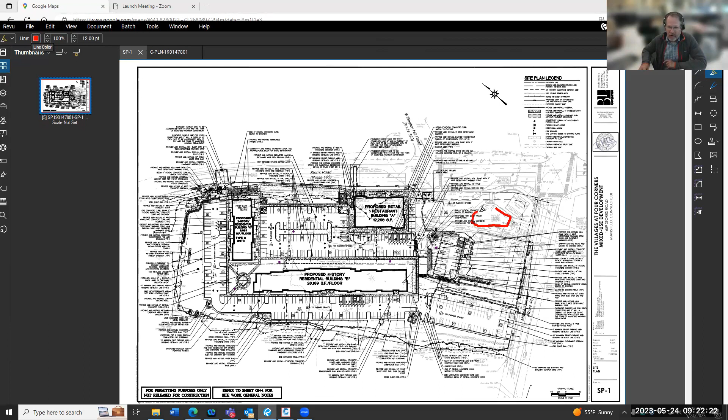Middle Turnpike is along the right-hand side of the sheet here. I'll just leave some marks. The existing gas station building is at this location in the corner. Hops Company, Toast 44 is at this location, also with access from 44.

What we propose to do is create 3 new buildings out here. One would be a commercial building at this location, approximately 12,200 square feet of new commercial space. Then 2 new residential buildings — one residential building at the far north side of the site, a townhouse building containing 14 units, and another multi-story apartment building located in a north-south orientation at this location of the site.

As far as access goes, today there's existing signalized access from 195, also at the intersection of Route 320, at this location here. There's also access to Middle Turnpike from the gas station at this location, and a little further to the west there's another driveway for access to the Hops Company Toast right here. We'll be proposing a new right-in, right-out driveway at the far northerly end of our site to 195.

With regards to pedestrian access, we're extending the existing sidewalk from the existing signalized drive to the north along 195. We will be providing a new sidewalk connection to the standard shown at this location to the north — they'll be extending a sidewalk connection to their property where we will meet that location. We'll provide sidewalks throughout our development to connect all the buildings as well as the commercial space, with various crosswalks to provide access back and forth. We'll also be extending sidewalks to the west on Route 44 down to the Hops Company.

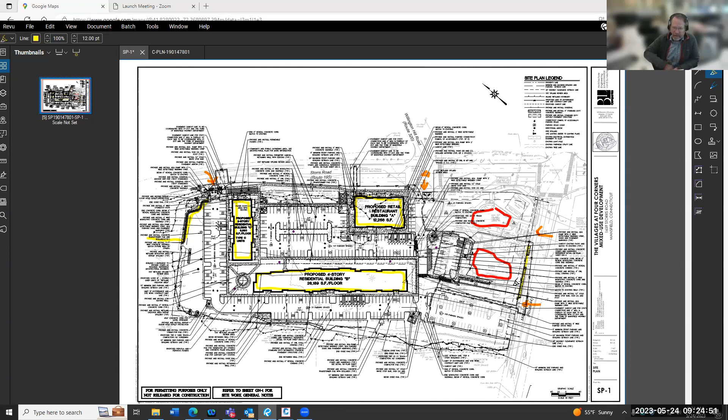There were some comments that we're looking at addressing, to provide additional sidewalks and crosswalk signage in various areas throughout the site and along the roadways. With that, I'm going to turn things over to Mike Shepley and Mike Dion, and I'd be happy to leave this up and zoom into any of the areas you want, unless you guys want to share any of the exhibits in your report. Thanks.

Sure, I guess what I'll say is based on our report, we have minimum impact to the surrounding traffic network. We looked at and analyzed both the AM and PM peak hours under this site plan.

I guess, do we want to go through the comments with Weston and Sampson, or do you want me to just give a rundown of the general traffic items for the report? Jen, it's whatever you guys would prefer. I think at a high level — it's up to the other folks on the committee, but I think keep it high level, unless folks would like more. The outcome is for you to make comments, to provide guidance, to look at your charge and see if their plan is acceptable. So high level is good with me. Yeah, I had considered — I heard a presentation eerily similar to this last week at the Economic Development Commission meeting on the project, so it's good to hear it twice, more sinks in.

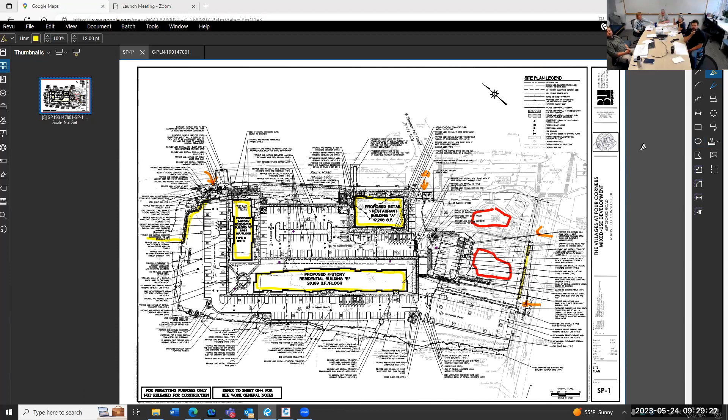Isn't there a loading zone associated with the Hops 44? And how is loading going to be addressed at the proposed retail and restaurant building? John, can you answer that?

Yeah, I can address that. So there is, I see another curb cut - yeah, so there's an existing curb cut for Toast Hops Company. I'll just pull up Google Earth here. You can see how they're doing some of their loading today in this area.

I think they've got some refuse collection here where some of their loading's happening. This area we're not touching, it'll remain unchanged. And obviously you can see the end of the sidewalk here on the right - we'll be extending sidewalks along the front, so there'll be a new apron in here. But as far as maneuverability, this area will remain unchanged.

Jumping back to the site plan, we do propose a new loading zone at this location, which is going to be used for the new commercial building at this location. We do have dumpsters throughout the site as well.

One of the comments from Weston Sampson was asking us for turning movements. So we've prepared documents showing maneuverability, truck access for not only our loading dock, but also for the proposed dumpster locations throughout the site. This location on the side is where the current loading is for Hops today, and that will remain unchanged.

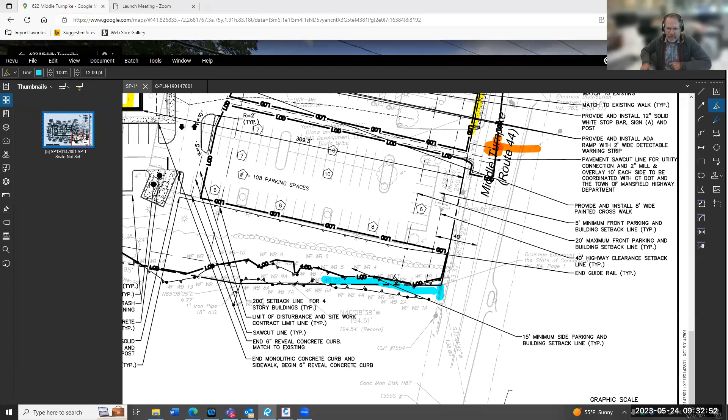If I jump back to the plan, you can see here where we've got a wetland area, a stream in this area, which is where the head wall is. There's not available right-of-way to install a sidewalk in this area, which is why we chose to end it at the proposed driveway, or the existing driveway rather.

But it seems like then you're just leaving somebody in limbo if they were vision impaired. At least they'd have a crossing on the other side in a refuge versus just leaving them in the middle of an intersection or a driveway.

Well, I'm not opposed to, if you're asking, can we create a crosswalk here with a dead end sidewalk, that's fine, we can certainly do that. I'm just saying I can't extend the sidewalk to the limits of our property because of the guide rail. We can certainly bring the sidewalk up and stop it at the guide rail. That's not an issue, if that's something that's amenable.

I think the Planning and Zoning Commission is going to want us to see a sidewalk along the full frontage. That's how they've interpreted this, for example, for the standard, then they let DOT determine if that's going to be feasible. So I think anything you can do to promote pedestrian access along there, when you're presenting to planning and zoning, you're going to need to demonstrate that.

Okay, we can certainly review this and see if we can come up with another alternative. Again, the guide rail is there as a safety measure to protect the culvert, so the state's not going to allow me to move that. That pushes us to look for a solution where we can keep that in place, and basically the sidewalk would need to move onto private property and then dead end at the wetlands.

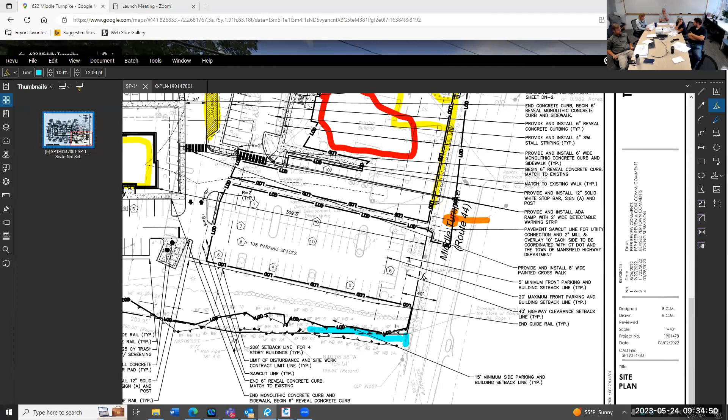And then to the north, it looks like that loading zone is only 36 feet long. I didn't have a dimension in length, but it doesn't appear that would—this is the loading zone that's currently in yellow—yes, correct, 12-foot wide. It doesn't look like it could accommodate any of the typical delivery vehicles that would be expected.

Again, we're looking at that right now. I know we've prepared some plans to address the comments, and I don't off the top of my head recall what size vehicle. I know we're taking a look at, to your point, can a vehicle get in here in a single movement, and do we need to extend this area at all?

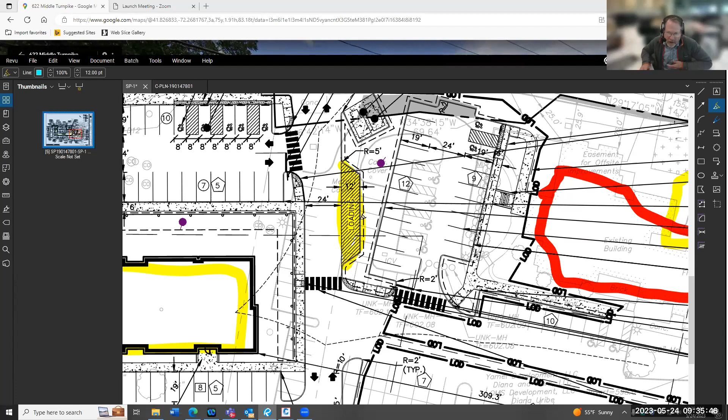We certainly have room, we can move, we could shift to the east and to the west if we need to lengthen that at all. But it's certainly something we're looking at now, to provide not only the radiuses to turn the vehicle in, but to provide space large enough for the largest vehicle. We are looking at that now.

And then the only other concern I had was the presence of those parking spots at the entrance of the intersection with 320. When you have a backing up movement, it looks like somebody would remain in Storrs Road, that bank of parking, these spaces.

Yes, again, something we're actually also looking at based on the comments. There are some parking requirements we're taking a look at, how we can meet those, where we're at currently to provide enough parking for the whole development. And we're seriously looking at eliminating some, if not all, of those spaces at this time.

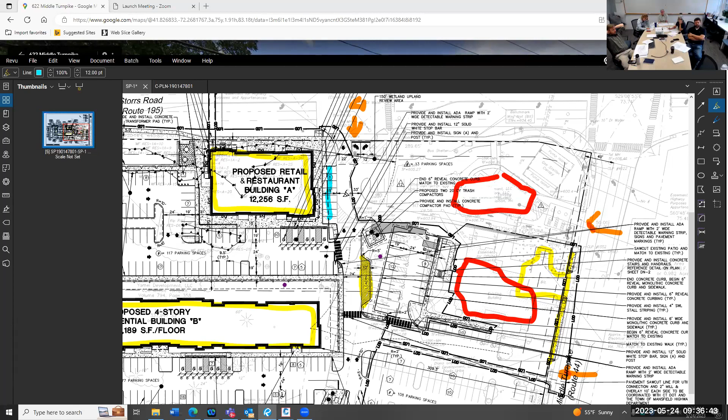One of the long-term thoughts or goal projects in this corridor is basically to incorporate roundabouts at the two intersections at 320 and 44. Could you maybe speak to what hindrances could exist there at this point? Because, from our conceptual review, there would be some concern that the roundabout wouldn't be able to fit in that intersection.

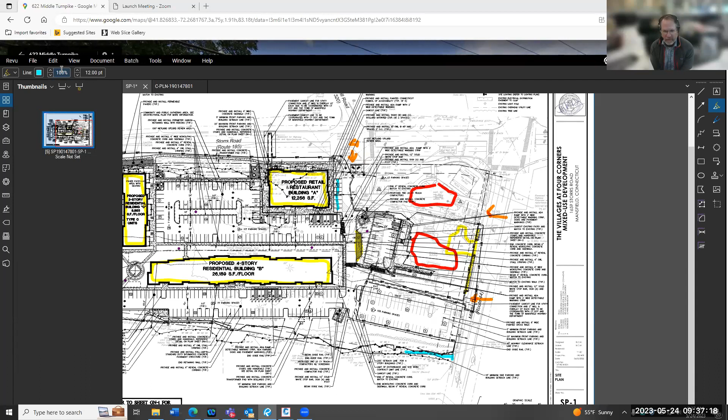Well, I was provided with a copy of the schematic roundabout plan. Attorney Smith had provided that to us a while back, so I'm aware of the concept. I don't think it's advanced beyond that, but there's the potential that the state would need to do takings of property in order to fit the roundabouts there, or they may choose to go with something smaller. As the design progressed, that would be something they'd have to look seriously about, how they'd get everything to fit. So when I look at the proposed retail restaurant space, there may be other considerations. I'm not an engineer certainly, but on this schematic, the upper right kind of corner of that space seems to be what could be bleeding into whatever the dimensions of the roundabout would need to be.

So do we know, or do you know at this point, whether or not, as shown here, there's overlap? And if there is, is there enough flexibility or adaptability within your site to, to use a layperson's term, shift the footprint of that building enough to accommodate your project needs, but preserve the future option of the roundabout, or better preserve that option?

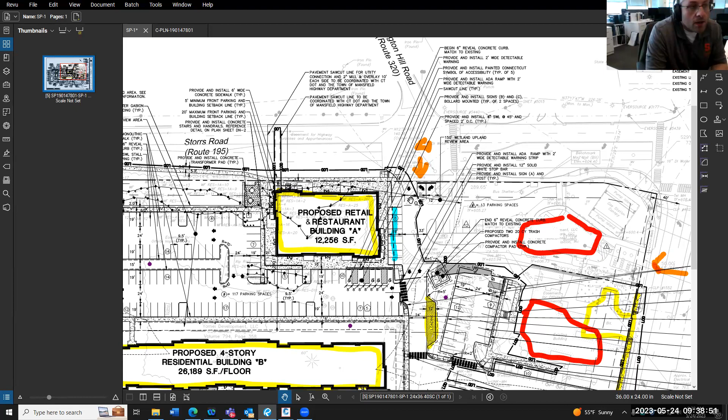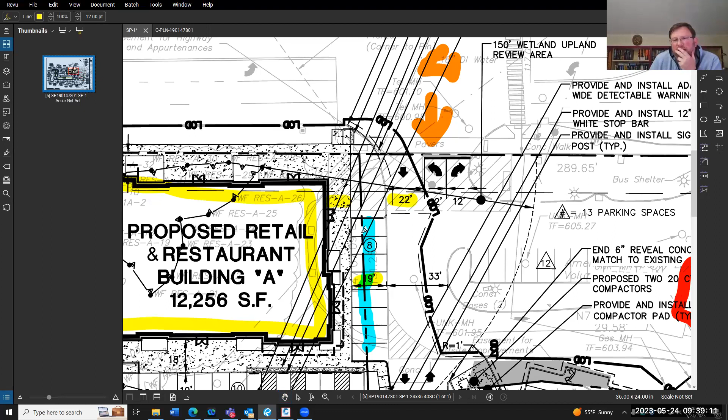John, could you just give a dimension from the center of the existing intersection to the corner of the building? I'm just curious how big of a diameter that would be. So you can see here, the dimension is 22 feet here. This is a 19-foot parking space, and roughly 10 feet of space, plus sidewalk from here. It's about 85 feet. Okay, yeah, it's gonna be tight to get the roundabout and fit that building.

Are they looking at a 2-lane roundabout? I haven't seen that concept. I apologize, this is Jeff Santa Cruz, Weston and Sampson. The state will only do single right now. Okay, yeah, that's typically what we've run into, is the state's very apprehensive about going with 2-lane roundabouts because motorists don't really know how to navigate them.

Do they do a traditional just straight single lane, or do they do like a hybrid where it has a left turn for major movements? Down in Salem, they have the hybrid left turn movement, was it on 82 and 85 down there? So they've done that in the past. It's just more of a traditional 2-lane roundabout there.

Okay, so it would be tight against you. You might be able to shift the round-- there's actually not a lot of deflection on that either. So it's very conceptual, and I don't know who developed this.

This was obviously provided to us. We had 3 days to get something together. It's not bad for 3 days. So what have you got looks there? Is that about a 120, 130 foot diameter roundabout?

Is that what that is, give or take? Approximately, to the outer dimension. Yeah, it's smaller. But all the approaches to these intersections is 1 lane in, 1 lane out. Right, so it doesn't make sense why you'd need a 2-lane roundabout when the approaches are single lane. Well, today the approaches are multi-lane, only because of the light on the main line, and then the side.

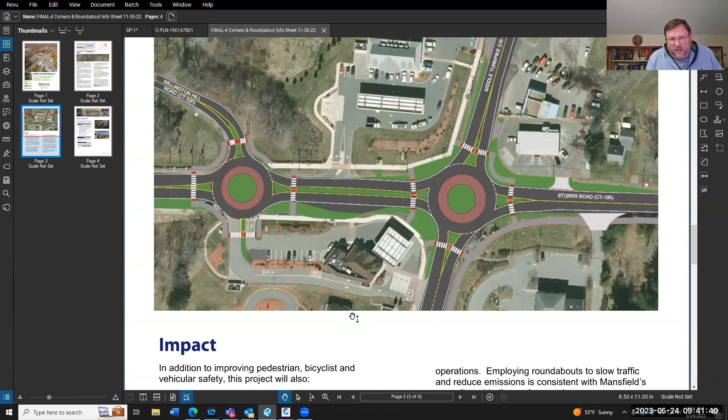If you figure 120 foot diameter, one thing you've got to consider is not only do you have the pavement of the 120 foot, but then you've got a grass strip from the roundabout to that shared use path, and then you've got the shared use path. So if you figure 120, say a 5 to 6 foot grass strip and another 8 to 10 foot bike path on either side, that starts to make that entire roundabout closer to 160 feet, which would put it, if it's centered on that intersection, pretty close to the corner of the building.

As drawn conceptually, without shifting it more onto 195 and 320, if you're centering it right on the middle, I think the hardest thing was making sure we got enough shift at that intersection with 320 if we shifted it to the upper portion of the site. But anything's possible with the deflector islands.

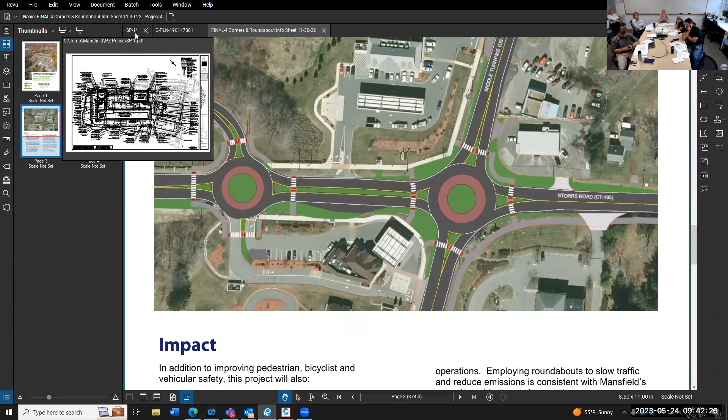I'm just trying to make sure people consider those outer pieces, the bike path and that grass strip. I think the biggest thing is making sure whatever's proposed is cognizant of that plan - that's really our only comment. It's a big project, a lot of reasons why it may not come to fruition, but I don't want this to be the reason why it doesn't.

We can certainly take a look at options and opportunities to adjust the location of that building. Because of the plan you've given us, we can schematically lay that in and see what the impact potentially could be, and we'll take a look at that. It's definitely the tighter side of the two rights of way, so there's some understanding of that. But thank you very much for the consideration.

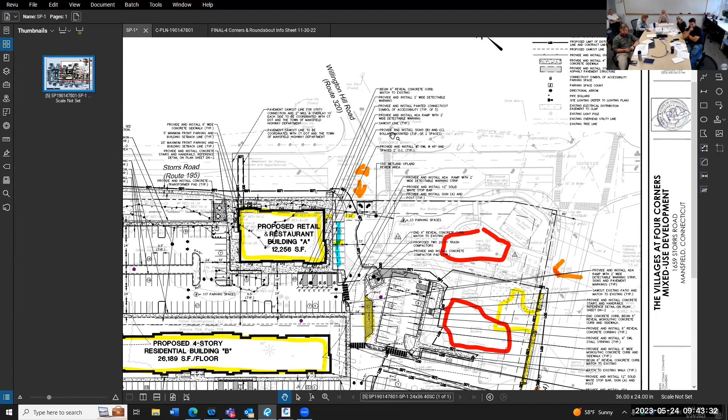All right, any other questions or anything else? Do you want to look at anything interior, any interior flow or safety? I think the comments definitely addressed quite a bit there. It's not really a town issue, but I would think that having direct or indirect access to the Hops Toast building off of 195, as opposed to having to go around since there's no existing connection between the gas station, is helpful for people and for the businesses.

Just to be able to navigate fire apparatus through there. And Paul and John, you've been in touch with - I know we had our overview meeting last week - but you've been in touch with Adam Libros and our fire marshal, just to make sure you've dotted all your i's and crossed all your t's before you have to make adjustments after the special permit is approved.

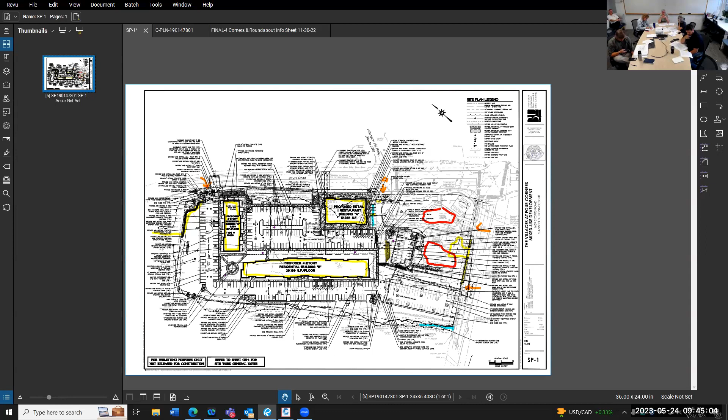Yes, we're reaching out to a number of folks in the town, including the fire marshal. I think from a traffic authority standpoint we're okay - we're just going to support the peer reviewers' comments at this point. Thank you. Thank you all very much.

Next on the agenda is 497 Middle Turnpike, 17 Cedar Swamp Road, and 3 parcels known as Cedar Swamp Road. We have Joe Williams, Chuck Lee, Tim O'Neill, and Maximo Polanco, who I've not met yet. If you all want to give a high-level overview similar to the previous applicant, and then talk about the traffic study - I know you just got the comments from Weston and Sampson yesterday, but hopefully you've had a chance to look at them - then Jeff can chime in as needed.

Sure, I'll start us off. Good morning, everyone. I'm Joe Williams, a land use attorney with Shipman and Goodwin in Hartford, and we're all glad to be here with you on behalf of your applicant, CMC Storrs SPV LLC. As Jennifer mentioned, my client Chuck Lee is here as well. I'll give a short introduction, then turn it to Tim O'Neill, our project engineer with Langan, to give you an overview of the project and the site plan. Then Tim will turn it to his colleagues to discuss our traffic study and the comments we received from Weston and Sampson.

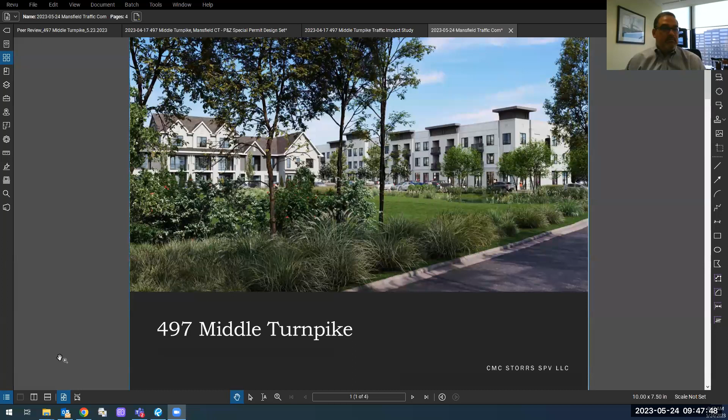So with that, I think I should stop there and turn it to Tim O'Neill. We have a special permit application pending before the Planning and Zoning Commission. We're glad to be here with you and look forward to hearing your comments. Take it away, Tim.

Thanks, Joe. Appreciate it. As Joe mentioned, the property is located at 497 Middle Turnpike. Here you can see the site highlighted in yellow with the property line. The total acreage on the parcel is just over 63 acres. Our development will be located in the southeastern 15 acres where the previous 9-hole golf course is located. I'll show you that region in just a second.

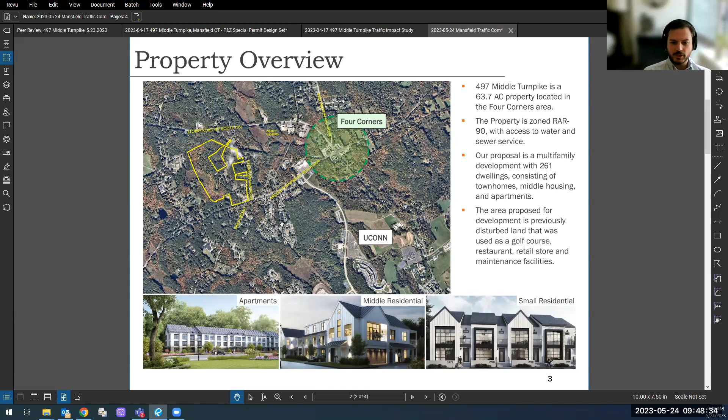You can see it's located just west of the Four Corners intersection, and UConn is located to the southeast of the site here. As Joe mentioned, we've got 3 different styles of buildings for apartments and townhome mixture, shown at the bottom here in this image.

Moving into the next slide, you can see this is the overall parcel zoomed into the southern region. You can kind of see where the existing golf course is today in the tree clearings. That's roughly where our proposed development is taking place, in the previously disturbed areas.

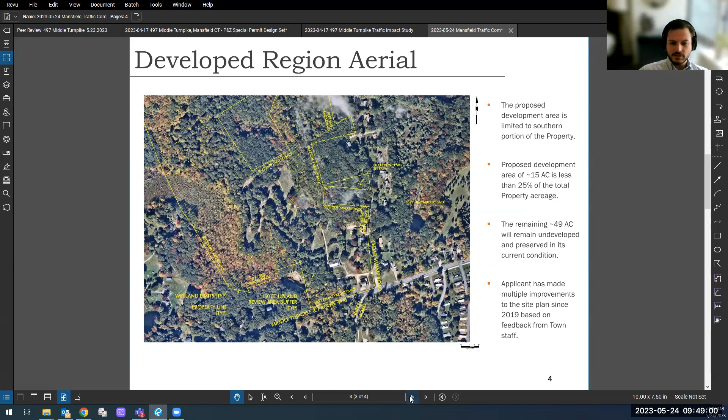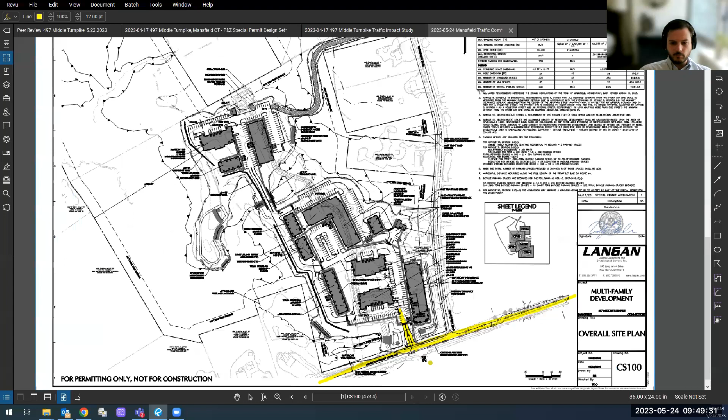Moving into our site plan here, you can see our proposed development, mostly on top of the previously disturbed 15 acres in the southeastern corner. The main primary daily use access for the site is located along 497, Middle Turnpike, along the south of the plan here, highlighted in yellow. The main entrance is located right here across from an existing road, Birch Road, and we also have frontage along Cedar Swamp Road that runs along the eastern property line.

You'll notice the site does have a secondary access, which will be used for maintenance and emergency access only off Cedar Swamp Road with a 20-foot wide gravel access drive, and that site access will also be gated with keys and appropriate access given to emergency services.

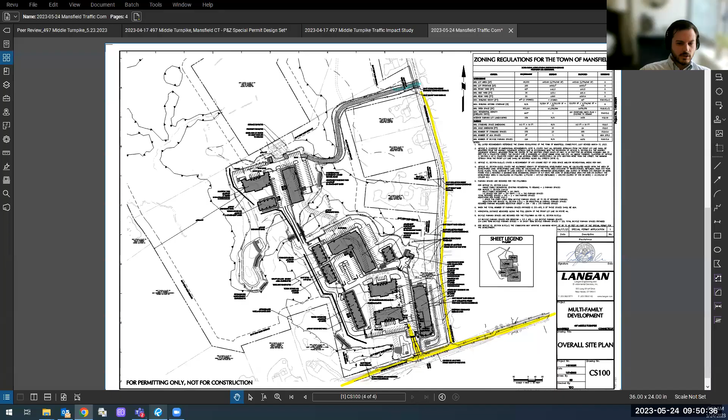And back to the site plan. Our proposed site, again, 261 mixed apartment units with parking throughout the site. The site is generally in 3 separate regions, a southern, a central, and a northern. Parking's been distributed based on the density of the units, providing parking at each unit appropriate for the amount of living space in each region, and 2 trash compactors and receptacles have been provided on site, a larger one for the southern 2 regions and a single one for the northern region.

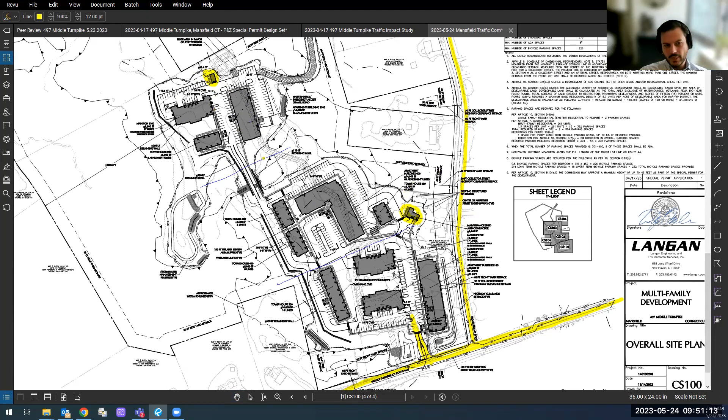Pedestrian access has also been provided throughout the site with sidewalk connections along roadways, access to front doors, and ADA compliant routes from ADA compliant parking stalls to entrances at the buildings. Pedestrian access has also been provided out to the right of way, but again, with no public sidewalks along Middle Turnpike on the northern side. There weren't any other existing sidewalks to connect into, so we've provided a connection to the public roadway if there were ever development along the road to bring a sidewalk down to this region.

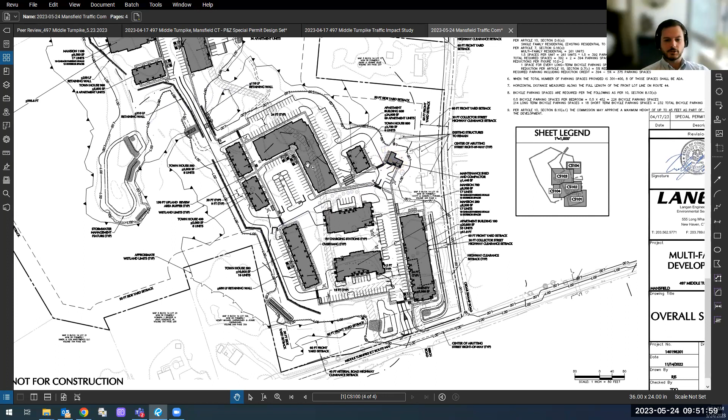And with that, I'll pass it over to Maximo, our traffic engineer, to discuss some of the results in our traffic impact analysis. Good morning, everybody. Maximo Polanco with Langan. We provided a traffic impact analysis for the entire development. The traffic impact study was done based on the latest standards using ITE Trip Generation 11th edition.

In brief summary, we've demonstrated that all the intersections we analyzed, which are 5 basically, are going to be having basically the same level of service as the existing conditions. We've demonstrated that this project will have minimal impact to the surrounding roadway network. We received several comments from Weston and Sampson, which we are comfortable with. I think the comments are very straightforward. Some of them involve coordination with OSTA and CTDOT, which we understand and we will do.

And then there are other minor comments in terms of the cycle length of the signalized intersections that we analyzed, which we did coordinate with OSTA. We can provide documentation of the latest or current signal operations at those signals. But overall, we've demonstrated that the entire area could operate easily with our development.

Also to add, we did include the Four Corners development previously presented here, and also included Stanford at Four Corners, the development north of the villas at Four Corners. So we're not only growing the traffic data based on historical volumes, we're also adding the committed developments being reviewed by the town right now, to take into consideration future conditions for the area.

Yeah, if it's okay with the authority, I can highlight a couple of things that weren't necessarily mentioned here. One is obviously the signal timing. I want to coordinate that and make sure OSTA and CONDOT have the same timings, because CONDOT actually maintains the cabinets. In previous signal projects, the applicant reached out directly to CONDOT to get the signal timings out of the cabinets, and they indicated they were coordinated. So I just want to make sure OSTA isn't going off a permit submitted a few years back, and that you're talking to CONDOT specifically for those timings.

We can do that coordination without any issues, and the coordination we did was in March 2023. Yep, if you've got documentation of what they provided for signal timings, it didn't match what we'd seen on previous projects reviewed in this area. That's not to say timing changes weren't made, but it's rare you go from coordinated to uncoordinated, so that's why it caught my eye.

We did notice in some of the synchro timings that between your no-build and your build, you had changed your entire cycle length. Those should be the same for build and no-build. If you propose improvements to make it better, that becomes an improvement, because that's not an adaptive signal out there - it's not going to automatically change its cycle length.

No, 100%, and I checked that - I think there could be confusion because the build and no-build have the same cycle length. It's just the one with proposed improvements that's changing. I would say changing it, but we'll look that out and provide a formal response to make sure there are no changes there.

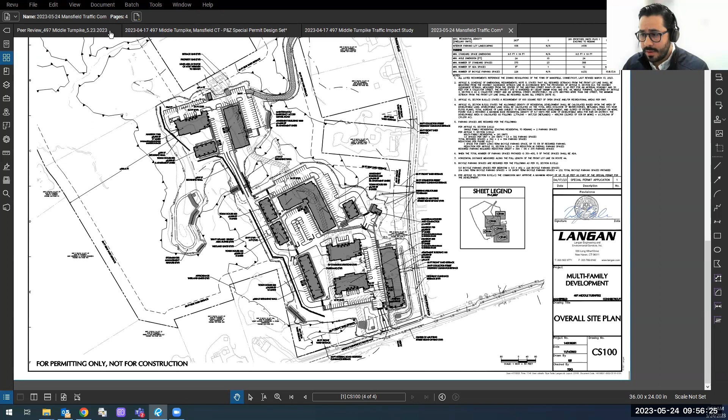And that is included - if you go to, let's say, page 8 of the report, we do provide a no-build figure, and Tim is showing it. So I'm not sure - that's not a figure though.

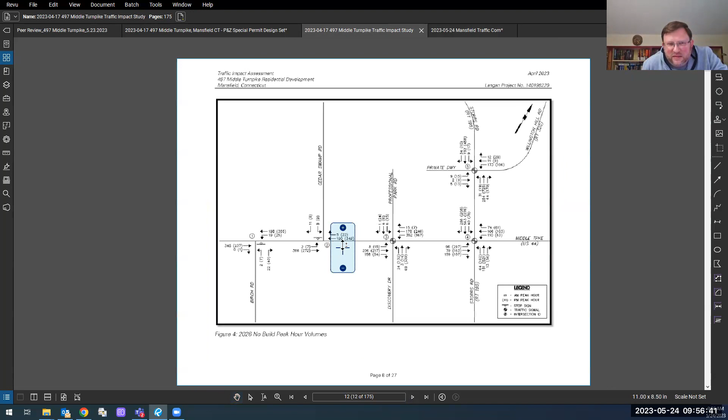If that's... okay, maybe I misunderstood what you were showing. Then I apologize, no worries. When I read the text, I was thinking that was what you added for the development. No, this is basically everything - existing, grown based on the growth we used, and added the committed developments. Okay, it's possible I skipped over it, I apologize. No worries, it's all been a good couple - as you can see, we've reviewed a couple of these in the last couple of days. That's okay, I apologize if it's there. It's not a problem.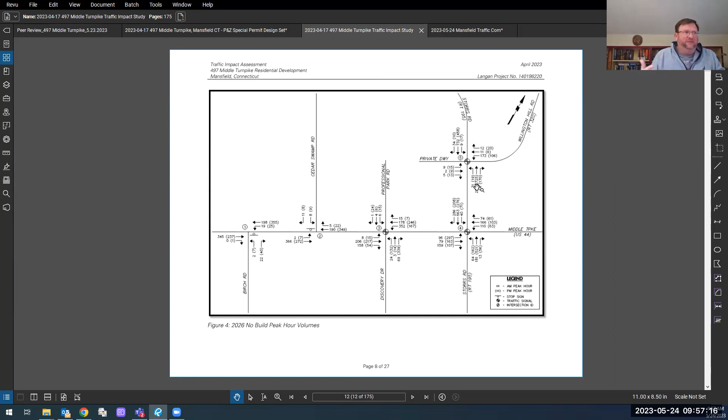One thing that concerned me is you showed your sidewalk going to the 44 roadway and just dead-ending - very similar to the comment we heard earlier about someone visually impaired being dumped into the roadway with no understanding. There is a shared use path that comes up Birch and continues on the south side of 44, so we would highly recommend this development provide a connection across the street at a minimum to that. This ties into the fact that, according to the WRTD website, there is a bus pullout and stop just down the street on Birch Road.

And that would avail those residents to be able to use that potentially as an access, or to connect to the shared use, since you're providing so much bike storage. It may even allow you to qualify for a reduction in parking because you are now providing a sidewalk and connection to a transit stop within the required distance per the regulations. So that's something that should be considered for connectivity. I know the authority has mentioned that extending a sidewalk along the entire frontage has been their standard.

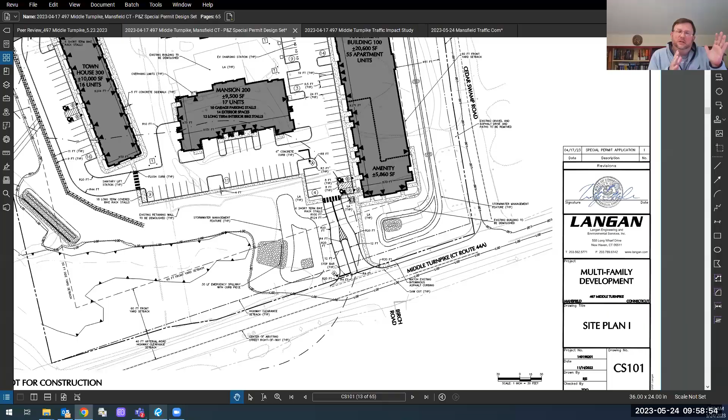And I would support that as long as we can treat each end of it safely. One of the other comments I had was the alignment of your driveway with Birch Road. You're quite a bit offset between the two, and if it's possible to work to shift that a little bit more to provide better alignment of the two roadways. Right now the left turns directly conflict, whereas if they were directly opposite each other, they'd have more ability to turn inside of each other. And the through movements now are also making an S-turn to go across the intersection rather than a straight through.

There were a number of little questions on parking and some things. There were some suggestions — like you have a lot of EV spaces on site, but I noticed you didn't provide any that have ADA accessibility. That is something I would recommend you look at as a possibility, if there's space to provide at least one in each area, because you have units designated as ADA in multiple buildings. So that should be taken a look at.

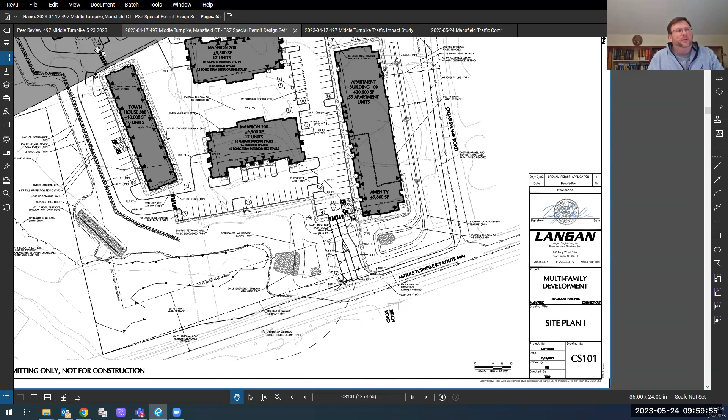I did ask if you had talked to the recycling coordinator in terms of the number of compactors and whatnot that you're providing. I know on other facilities we provided more that are closer to the buildings. It's quite a walk if you're carrying trash from some of these buildings to your location. So that's something definitely to talk through and have a discussion with them.

So Jeff, we're going to have a meeting on Tuesday to kind of talk about all sorts of things, so maybe we should focus the broader comments during that meeting, if that works for you all.

And we're just traffic. Yeah, they're just traffic.

Okay, I'm sorry — I think because it relates to where I was going with that, it relates a little bit to circulation. If you suddenly put some of these dumpsters in other locations, the truck turns now have to be adjusted. That's a good point, Jeff. Thank you, I apologize, I probably should have led in with that.

You will have to provide sightline diagrams for your main entrance onto 44, in coordination with the ConnDOT standards, which when you read how they word it is slightly different than how AASHTO looks at it in terms of the offset distances and whatnot. Just verify that through a profile, and confirm that none of your landscaping is in conflict.

We did have some questions about some of your bike parking spaces, both in number and location. So that's something please take a look at to make sure that it is meeting the regulations.

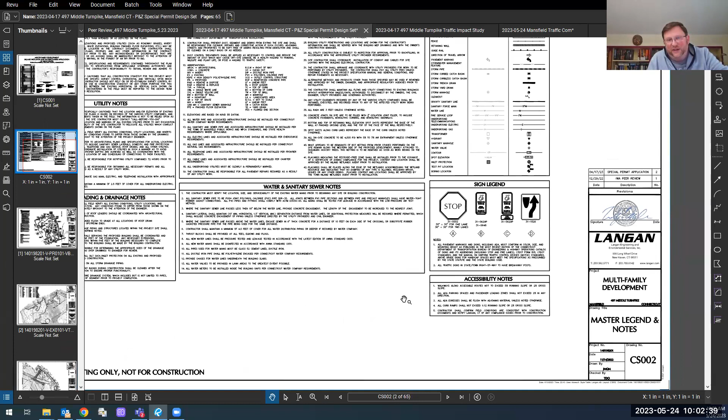Just kind of going through — a lot of it is signing. Some of the signs aren't labeled, and there appears to be letters there, A, B, C, D, but I couldn't find a legend that necessarily mentioned A, B, C on the site plans. That's why they're way in the back. Okay, that's why I was having a hard time finding them.

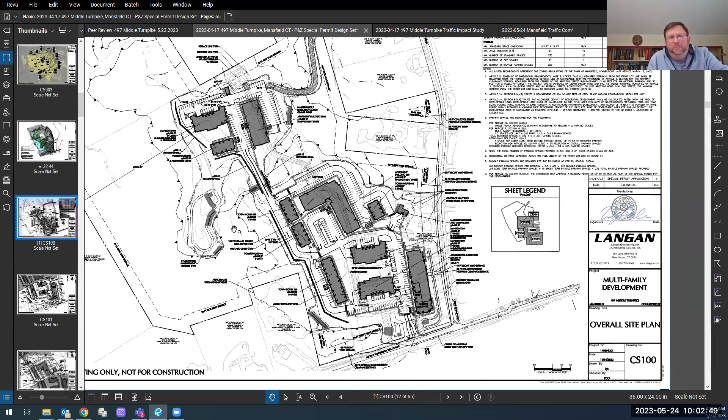The parallel parking spaces was a big one. I know the regulations for the town don't really describe the difference between parallel and perpendicular, but the spaces you've provided are 9 by 20. First of all, that falls below the minimum width required by the town, which is 9.5, and while it does fall slightly above the 19 that their standard says, it falls below the national standard of 22 feet. So I think you may have difficulty with large vehicles trying to use those, especially the couple around—I apologize, which building it is here.

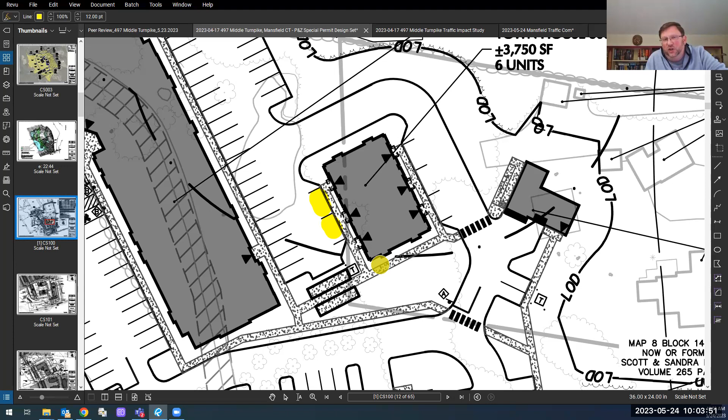Building 800, you actually have parallel parking spaces that are located in a dead end. So I'm kind of curious how people actually use those spaces, because no matter which way I pull into that space, I've got to make about a 5-point turn to get back out or get back in. So it's something I think you need to look at. Maybe there's a possibility of relocating those spaces elsewhere to make them more usable.

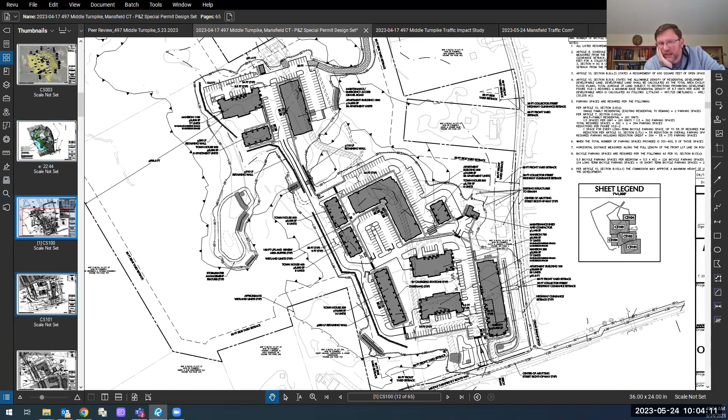We talked about, obviously, the operations and the signal. As far as the access road, please make sure you provide the turning movements for the actual entrance onto Cedar Swamp Road for the emergency access. I saw you have them kind of going through, but it didn't look like you actually had them turning in and out from the side road to make sure that the radiuses there are appropriate.

There was some appeared on the turning movement plan—it was a little difficult to tell what the difference was between the edge of the vehicle and the wheels. If it's possible to either use a different line type or different colors where they get real close together and right up on top of the curb line, it was difficult to tell if the wheels were actually going over the curb. A couple spots it looks like they were, so if you could take another look at that, that would be great.

I know there's a couple spots where the trash truck actually appeared to overrun the curb, but given the scale of the plan, perhaps if it's a little bigger scale, it might be easier to see.

I'm sorry, I'm just trying to scroll through the letter here. I think that was the majority of traffic related. Like I said, the big one was just trying to coordinate what the signal timings were, and that was just to kind of prove that you didn't have that off-site impact at the signal, if the timings were incorrect.

Yeah, and we'll look at that. Yep, certainly—you mentioned it, and that's not a problem.

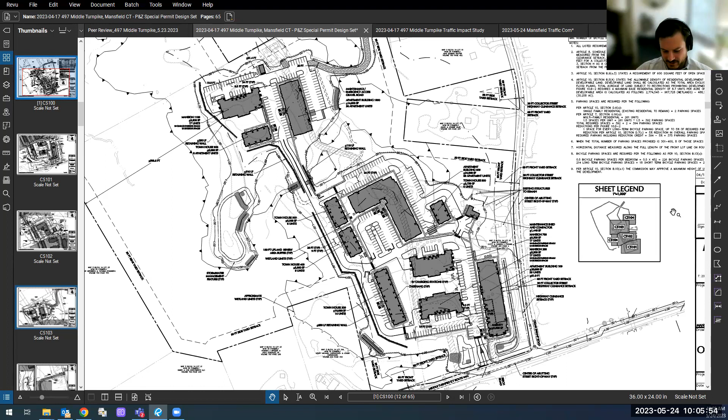So the crosswalk across Route 44—we stayed away from that for this application intentionally, just because this is a high-speed roadway and there's no signalized intersection within close proximity to the project. So we'd have to work through a safe crossing. I know we do have very large sight lines. There are 2 other intersections in close proximity, or drive entrances, so it's certainly something we're going to look into with the DOT. We'll continue to chase that one down.

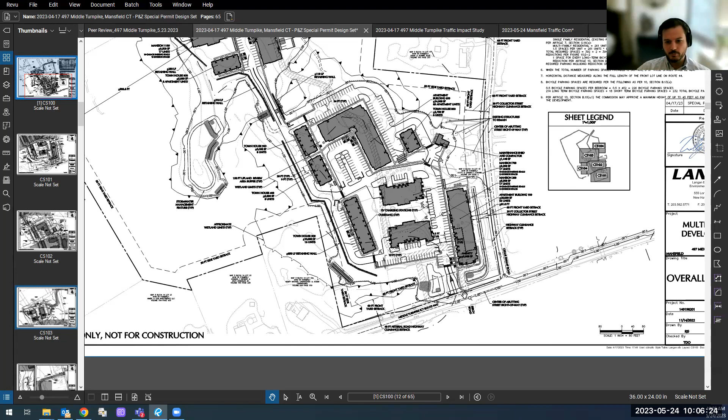Sidewalks along the frontage of the property is certainly something we're open to. If the town would like to see something like a connection coming along the frontage of our property, teed up for a future tie-in from Cedar Swamp or to the west, it's something we can definitely look into. We just want to make sure we're not providing any confusing dead ends for anyone in the town, so we'll continue to coordinate that, open to the idea there.

The driveway alignment with Birch Road—the thought is that we were kind of keeping our driveway a little bit further to the west here to help provide more queuing length for Cedar Swamp traffic turning in, to help those intersections. It is slightly offset, but it shouldn't significantly deter traffic or cause an issue, especially with the low volume we're expecting to actually make the movement across to Birch Road into the property and the other direction too. So again, something we can continue to look at, and we'll respond to that in comments.

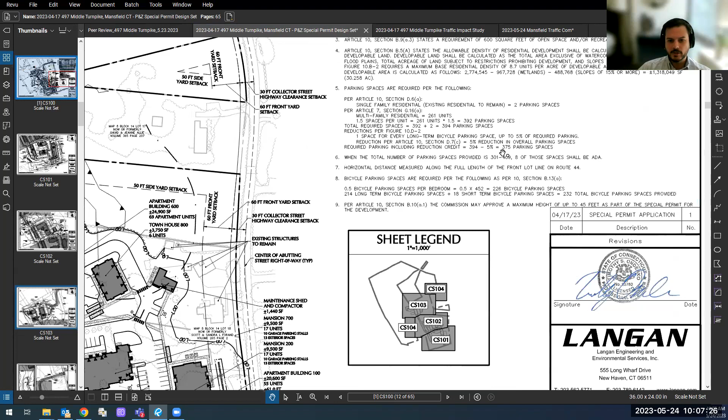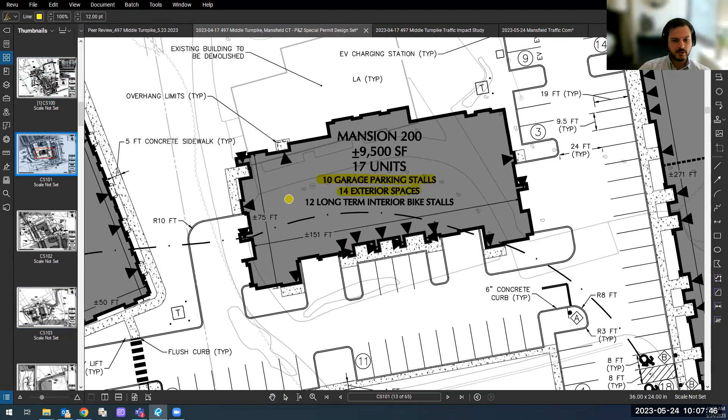The parking and the bike count—I think we could have spelled it out a little bit clearer where some of these were coming from, but the townhome or mansion-style buildings, which there are 3 of, located throughout the site, 1, 2, and 3 up in the corner—these actually contain, let me go to the zoomed-in one so you can see this better—garage parking stalls, exterior parking stalls, and long-term bike parking internal to the building and in the driveway. So I think that's where the rectification in the parking stall got lost there—differences, yeah.

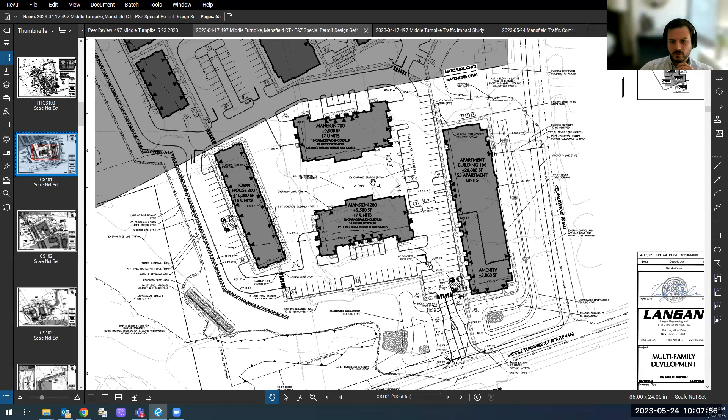Okay, yep, so that should be that one. And then the trash compactors.

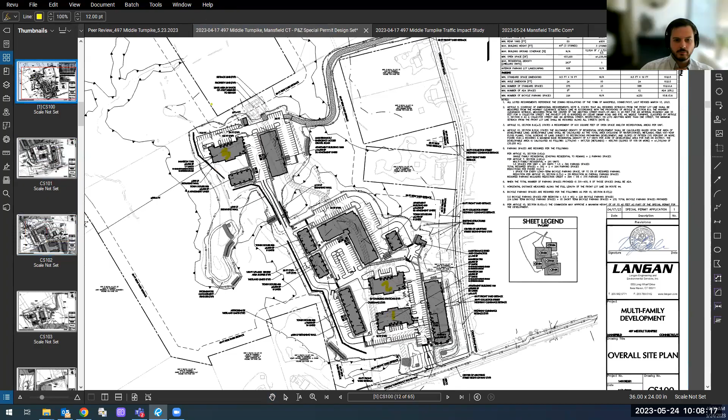I think you found our primary trash compactor for the bottom two regions that I was speaking to earlier, located just off the right side of the page. There's actually a second one located in the northern part of the facility, a little bit smaller. This first one accepts a larger compactor size, and we sized the truck turning movements for the larger flatbed roll-off compactor in this area.

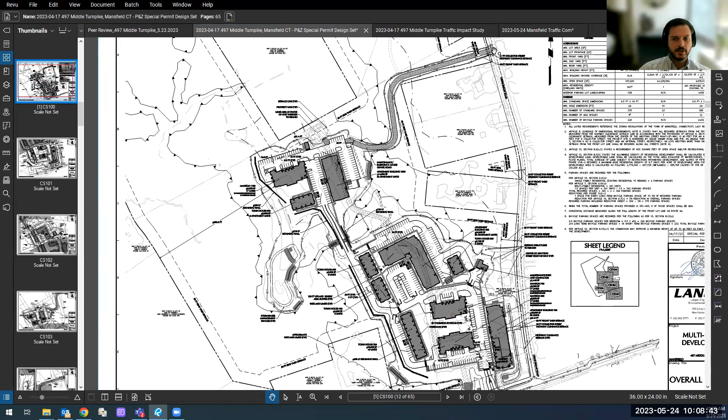We are certainly going to put together a truck turning movement with some larger scales. We can take a look at some of these critical areas, and we'll provide the movements to the in and out at the emergency exit, and some blow-ups for the more critical zones too. We can certainly do that, it's not an issue.

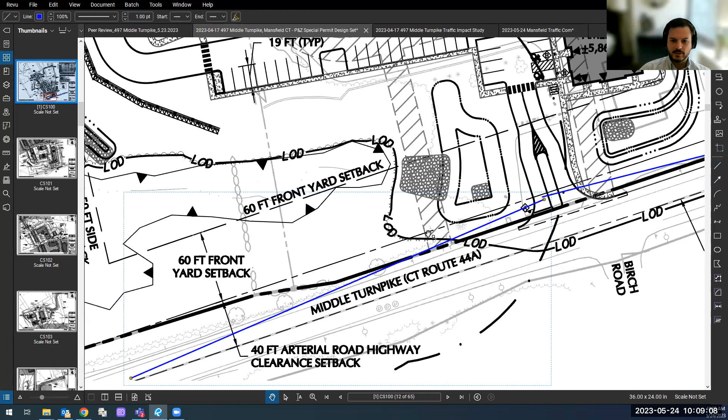Sight lines, again, we'll get these added into the report and on the plans if you need them. There shouldn't be any issue. We did look at them from the correct definitions, and we've got very clear and long sight lines, so that shouldn't cause any issue. With the offsets, we missed the existing vegetation that we're leaving, and our proposed landscape plan will certainly avoid planting anything in that view shed as well.

The ADA ramps, yeah, we can absolutely label those, make sure I get those in the plans. The parking stalls, we'll confirm routes from ADA parking through the building to the units, ADA entrance locations, and we can label those on our actual site plans too.

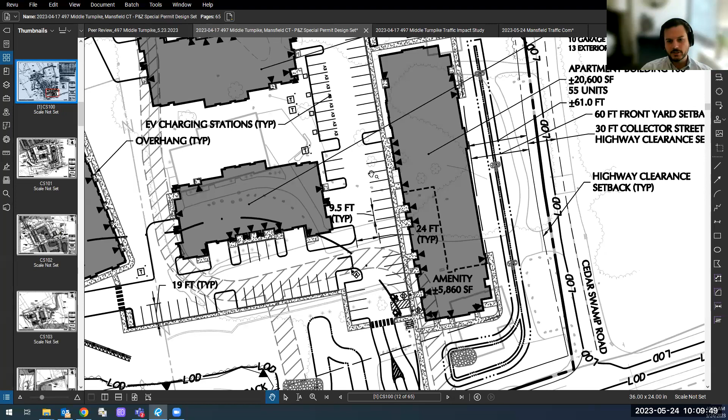These ADA locations are somewhat flexible. We've graded out a few options if there were changes in the plans that we could actually relocate these without changing any grading or substantial operation to the site here. So certainly identify those and make sure those are clear.

Parallel parking, we can take a look at resizing those stalls, making them a little bit wider and longer to accommodate some of those movements, specifically the ones over here. The intention was to come in and do a hammerhead and then back in or pull into these. We can look at those movements too and kind of clarify those.

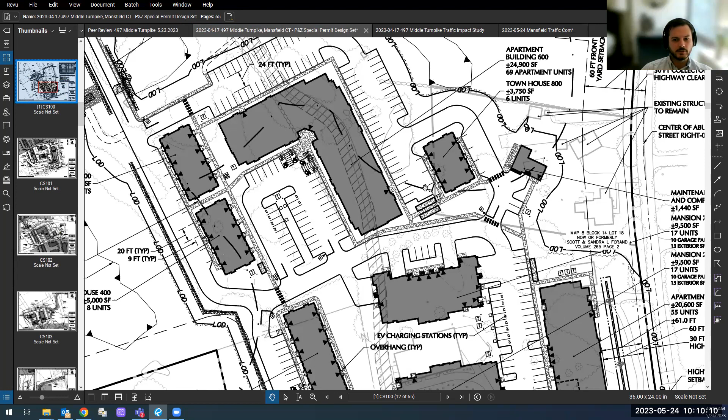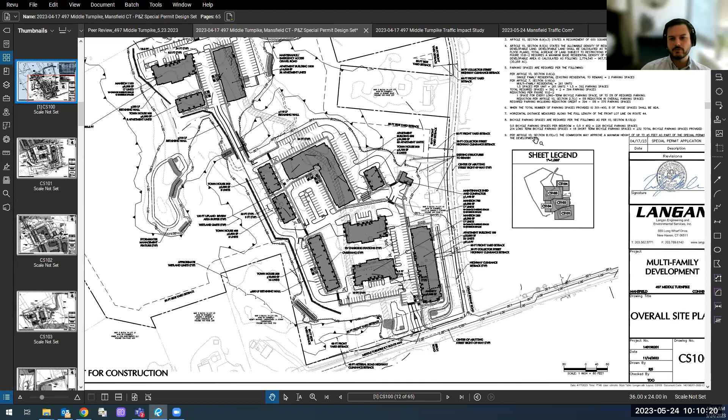In terms of the parking counts itself, we're actually providing more than what we are required to right now, taking credit for some of our reductions. So if we did need to lose one or two stalls while adding a couple feet to some of these, we could certainly accommodate that and still be within the regulations here. We also have some room to expand some of these and bump down the parking a little bit if we need to make those a little bit wider. So again, not an issue, and I think that's something we can certainly address.

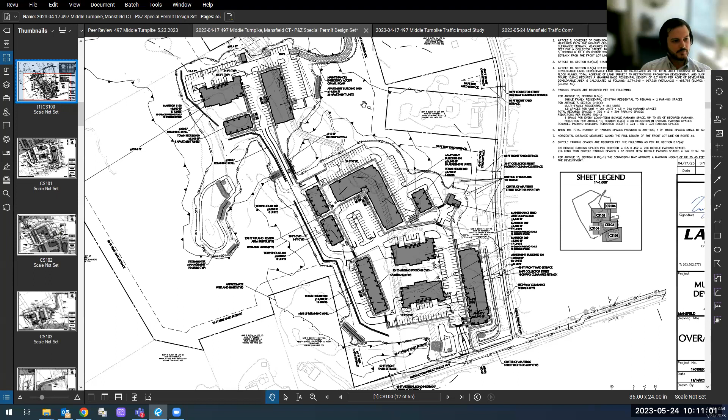And I believe that was most of the list that we just went through, so I'll open it back up to any questions that Jeff or the commission might have. I think we're all good, appreciate the presentation. Thank you all, thank you very much.